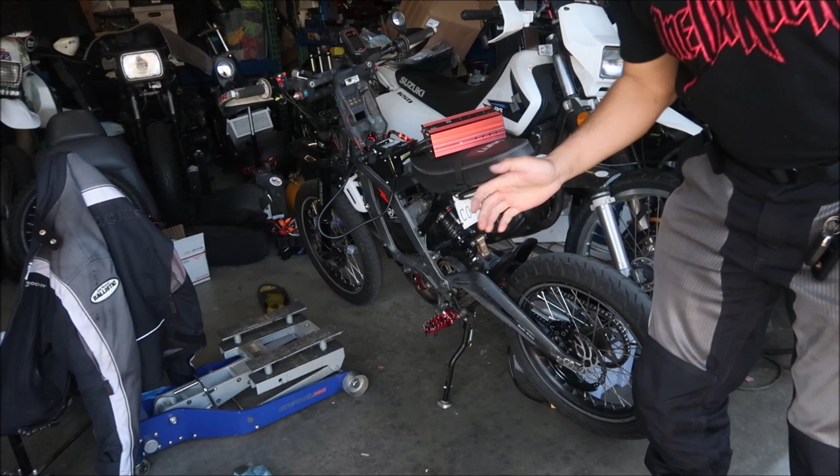As we go, right now you can see we're at 67 volts. I think it was like 63 volts when we first started. It sure is creeping up fast, but I imagine once it gets to about 70 volts, it's going to stay at 70 volts for a long time. You'd have to kind of look at the chart for how the voltage or the charge curve is.

A lot of batteries, especially lithium-ion batteries, have a flat curve. It's flat until it runs out of power, and it just kind of nosedives. That's what happened to me when I was riding - it seemed like it was running fine, and suddenly poof, no more. Not much of a warning, so you got to be careful.

When it gets to that flat line, it'll suddenly go up, and that's when your battery fully charges. That's when you're at about like 90%, and that's when the charge starts going down a little bit. But yeah, you'll see I've got it set to 12 volts, 12 amps. I will be keeping an eye on it.

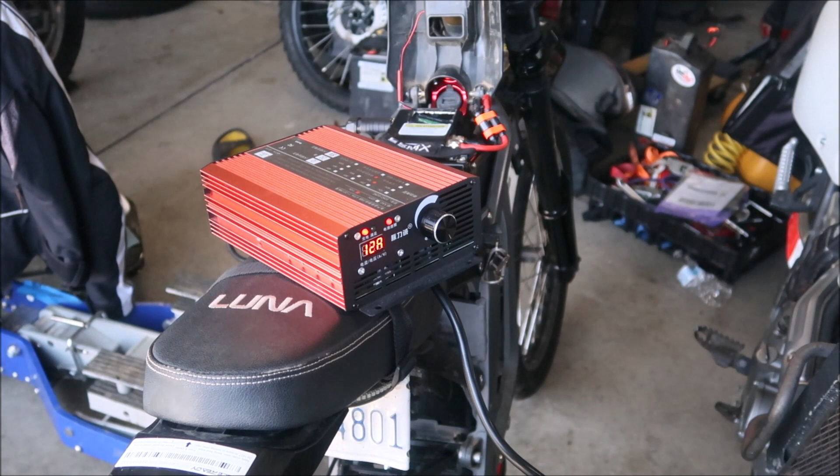I can look at my inverter - it's hooked up to my solar inverter right now. I can tell if the load drops suddenly, because this eats up about 1000 watts. So we'll see how long it takes to charge this battery. My guess, from what I heard, is it takes 3.5 hours to charge it. So we'll see, we'll charge it back up to 100. See you guys then.

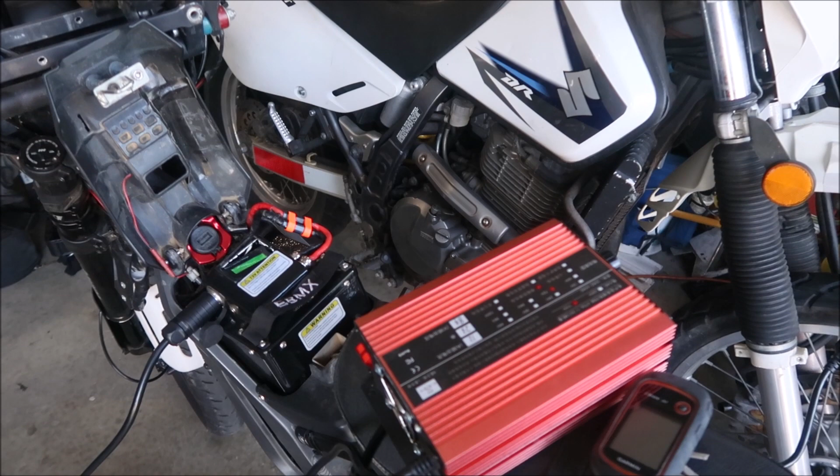Okay, like 17, let's call that 20 minutes into the charge. 20 minutes, we add like 3 minutes. So I want to feel the cord. The problem I had with my Lightspeed Bikes charger is that this thing would get too hot - the cord would get too hot. So the cord is thicker on this one - this is a very thick cord, like a 14 gauge cord.

However, the connector gets pretty warm. I can feel my extension cord getting warm here. This is a pretty heavy duty extension - a 14 gauge extension cord, so it shouldn't be getting hot. That's what I say, but it's not like super duper hot where I think it's going to catch on fire, so I think it's okay. The Lightspeed Bikes charger would get really hot - the whole cord and the plug would get hot, everything would get hot. I would have to put a fan on it to cool it down. This one, no problem - the cord is adequate for this charger.

And I know you can get these chargers from Grit Shift. This is like a $200 charger, guys, pretty expensive. So we will note how hot the charger gets maybe after like an hour or so. Like I said, I think this is going to take like 3.5 hours to charge - that's what they quoted, they say it takes about 3.5 hours to charge. We'll find out. It was completely dead when I plugged it in.

All right, it's still plugging away, guys. 2 hours and 33 minutes, all right? Still charging. It's about 78 volts. I don't know if you guys can see that. Yeah, 78 volts. What is that?

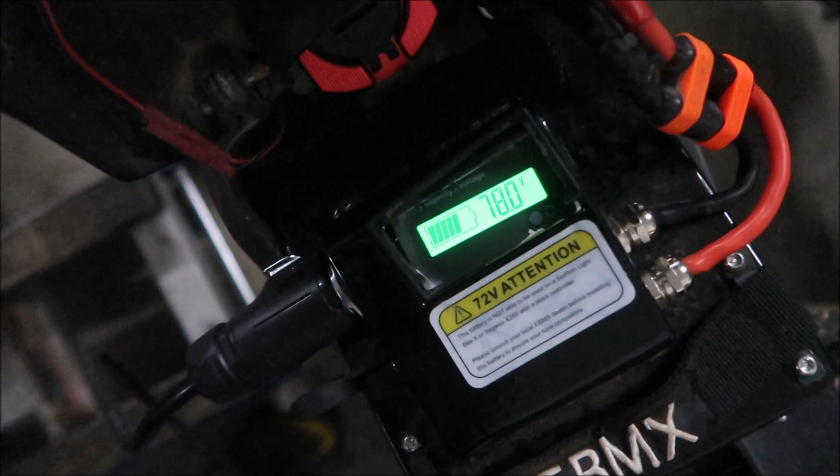It's like 80% or something. Yeah, somewhere around 80% charge right now. So still got some ways to go. Actually, we're supposed to add 3 minutes to that, so it's 2 hours and 36 minutes right now. To get to about 75-80% is like 2.5 hours.

Okay, guys. Keep on plugging. This is the part of the charge curve that takes the longest, guys. This is where it absorbs all the energy, okay?

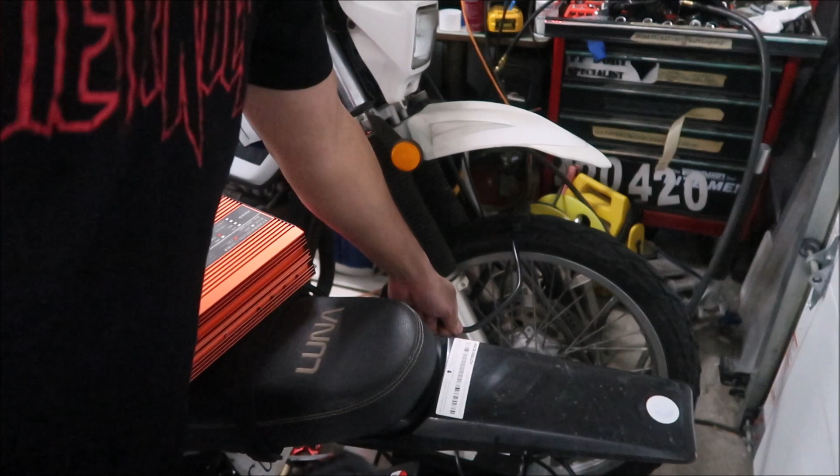All right, also I want to do a quick report on the cable. The wire, not really warm at all. The plug is pretty hot. Yeah, the plug is hot, man. The cord is starting to get hot, the extension cord.

Well, the farther you get away from the plug, it starts to, yeah. I think the plug is like the kind of limiting factor here. The plug gets really hot, man.

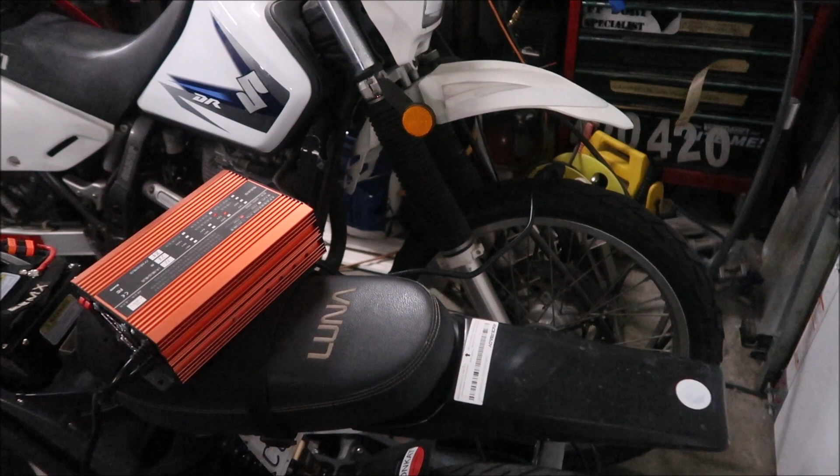Maybe this plug is not supposed to be used for how much current we're pulling right now. Let me see. Okay, I've got this hooked up to my inverter right now, and I'm not pulling any other loads. So right now we're pulling about 1,000 watts. That should be perfectly fine for a 120 volt outlet, American 120 volt outlet can do like 1,500 watts, guys.

Fine, all right, so there should be no reason it's getting that hot, all right. But it seems okay, it's not getting like super hot, is what I'm going to say. So yeah, maybe it'd be better to plug it straight into the outlet. But the wiring is not getting hot at all, the wiring is perfectly fine. The only reason this wire is warm is because the plug is getting warm and that heat is transferring to the wire. So it seems like the wiring is good, but the plug is generating a lot of heat, okay?

And I'm using very good wiring. I got it hooked up to a 14 gauge extension cord, all right? That's a very high quality extension cord, okay? But yeah, you shouldn't use an extension cord with this, guys. You should plug it straight into the outlet, but it's just easier for me, okay? But anyway, it seems like I've had it on for 2 hours, and it's not super hot, so it's fine, okay?

All right, if you're wondering if the battery's getting any warm at all, it's not, guys, all right? It's a little bit warm, teeny tiny bit warm, but it's perfectly fine. This 42 amp hour battery, you can safely charge it at like 42 amps, guys. So that's 1C. You could safely probably charge it at like 80 amps, okay? So the battery can definitely handle this, okay?

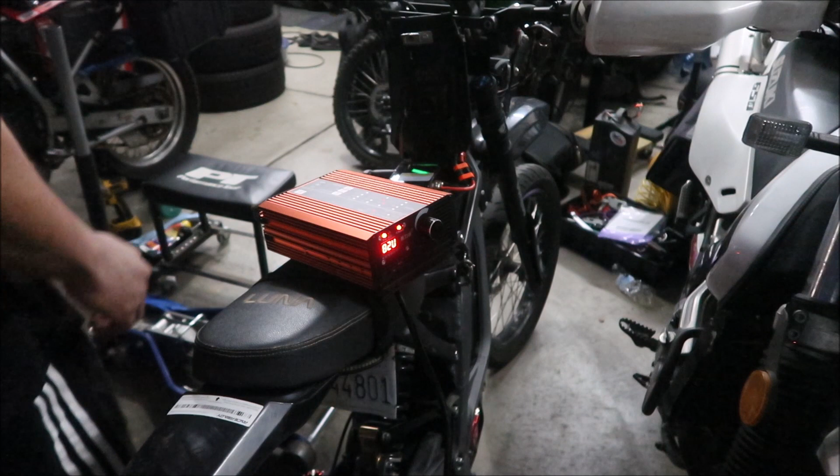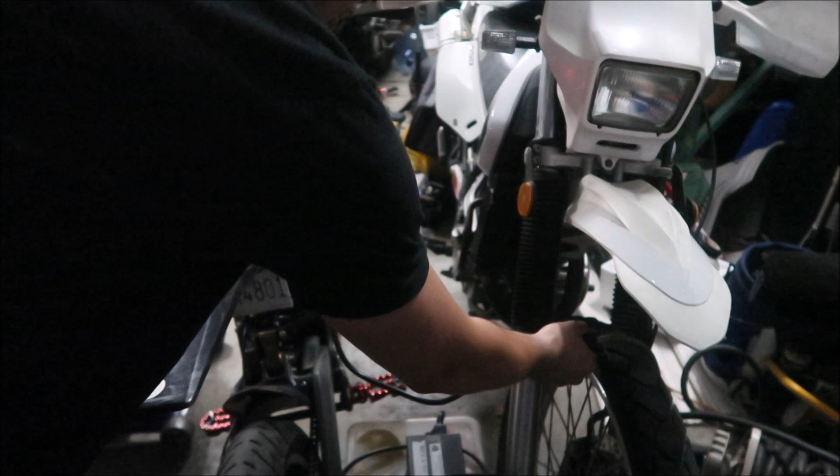And it's pumping 11 amps into it, all right? And after 3 hours and 17 minutes, the cord is warm. It's warm, but it's not hot, okay? Yeah, it's warm, but it's not. I think it's because I opened the garage and it's cool right now, so yeah, definitely on a warm day you want to watch that, okay?

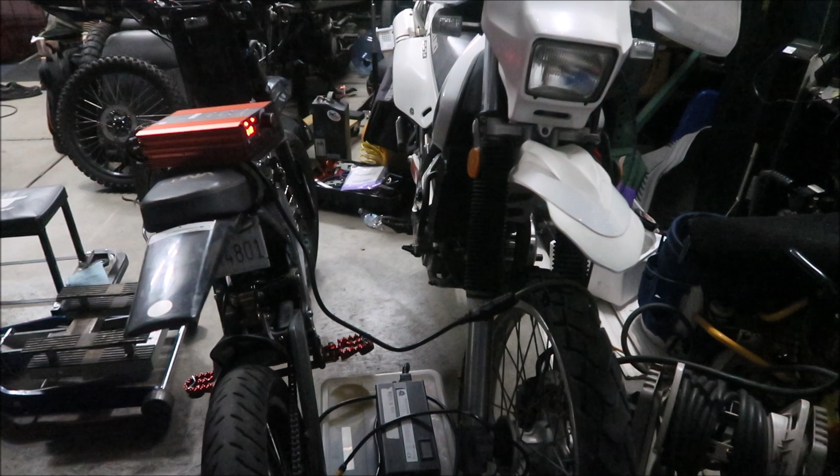Or just don't charge your battery at a high rate, okay? Like 12 amps, just charge it at a lower rate and it will stay cooler, all right? The cord will stay cooler, I guarantee you that, okay? So yeah, we're just waiting for it to finish. Supposedly this battery takes 3.5 hours to charge, and we got like 10 minutes pretty much. All right, because remember we add an extra 3 minutes.

All right guys, 3 hours 44 minutes plus 3, we'll just call that 3 hours 48 minutes. Okay, still charging, you could hear it, guys, this fan is hella noisy, man. We're at 83.8 volts, all right? We're nearly charged, all right? But it's still plugging away.

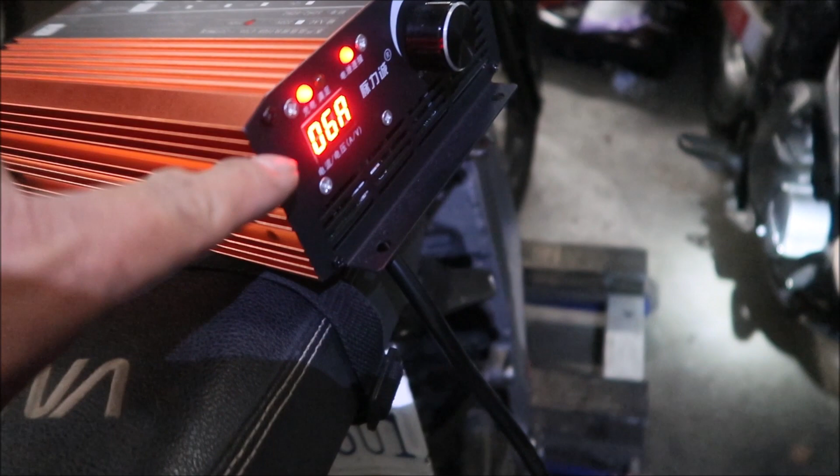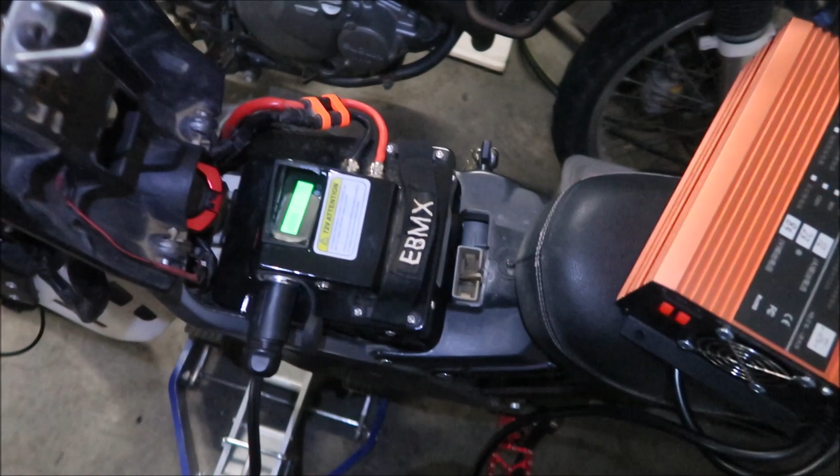Oh, there it goes, it's moving around a whole lot. I think it's almost done charging. All right, let's see what this says. This says we're at 84 volts. It's pretty much done charging. We can watch it finish charging right now, okay? So the charger should shut off real soon.

It's at 84 volts. All right, this should start to get cooler, but it's still warm. Okay, it's cycling between 6 and 1 and 10 and 3. I never seen my charger do that before. All right, it's almost very similar to this charger. Okay, but it's doing some crazy stuff right now. It's nearly charged.

Any minute now. I know, we really shouldn't watch it charge, guys, this is a bad idea. But it says it's 84 volts right now. It's almost 84 volts, yeah.

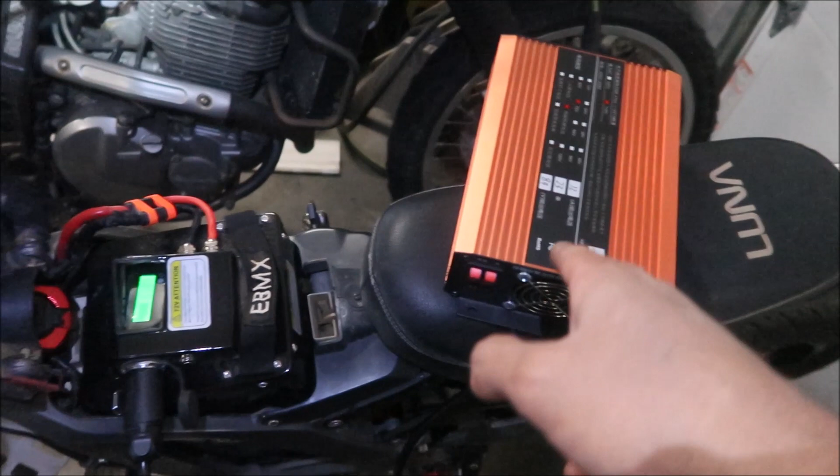I'm pretty sure that the battery, if it gets high enough, will say hey, no, I don't want any more, I'm going to disconnect. But... oh, there we go, there you go. So it's trying to top it off a little bit, all right? It's at 83.9 volts. So I think what it's trying to do is lower the current down a little bit. Yeah, it's trying to lower the current so it can cram as much power in there as it can.

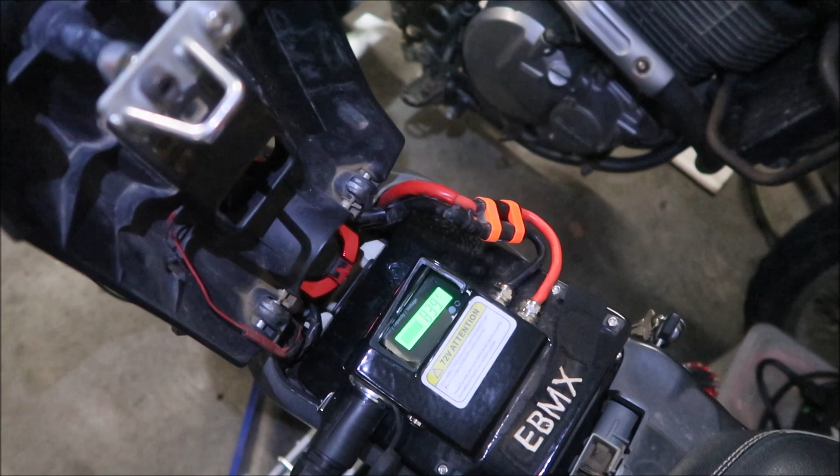I pretty much say that's fully charged right now, guys. It's still just shutting off and turning on. It's 83.9 now. Starting, stopping, starting, stopping. It's gonna stop eventually, it's trying to get as much power in there as it can.

All right, so my suggestion is don't charge it all the way, guys, if you're not gonna ride it right away, like the day before or something, you know. If your bike is gonna sit for more than like a day, then don't charge it all the way. So it's better for the battery.

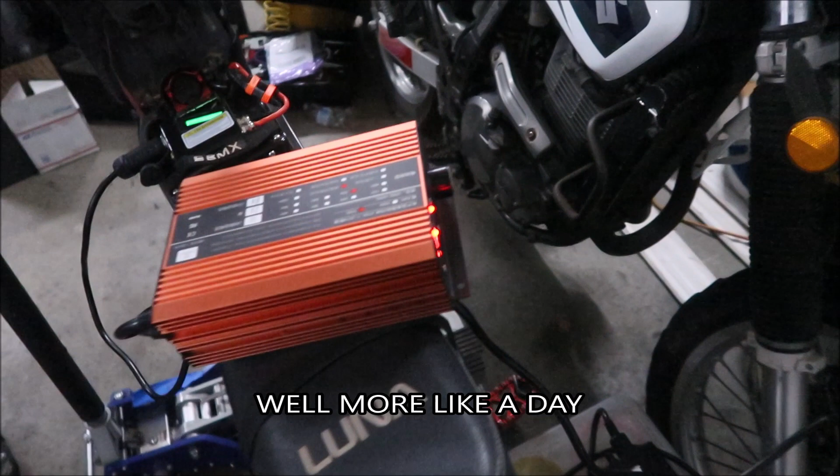But yeah, it's still plugging away, keeps on saying it's charged and not charged. That is really weird, my charger never does this. It might do this a couple times and then it just stops, but this one kind of can't make up its mind if it's charged or not.

It's trying to get it to 84 volts exactly, guys. You can hear it. So remember, when you get past like the 90% state of charge, like around 82 to 84 volts, it's going to start lowering the current down.

Should we help it? Should I lower the current down? I don't really want to touch the charger. I haven't touched the charger at all, other than like to put it in, like to change the voltmeter. That is so odd, right?

I want to look at the charge curve on my inverter and see what it looks like. It's probably gonna have all these dips and stuff. It's trying to get it to 84 exactly, man. It's at 83.9. I don't know if that's good for the battery to just have it turn on and off like that all the time.

Should stay red. Okay, oh no, I thought it was gonna... It can't decide if it wants to charge or not. It was thinking for a second, oh I think it's charged, I think it's charged. Okay, that's it, I'm not waiting anymore.

That's it, it's done, all right guys. It says 84 volts, it's still playing this little thing. So what it's trying to do is lower the current just enough so this doesn't overcharge, all right? It's trying to get it at 84 exactly. Even though it's at 84 volts right now, it should stop right away.

Oh see, so when you apply a current to it, the voltage will go up, and then when you take the current out, the voltage starts to sag. So what it's trying to do is keep it at 84 volts. I think it's done, guys. Yeah, it's still trying to top it off, but I'm going to say that's done, all right guys.

So it took 4 hours to charge this battery. Yeah, let's just call that 4 hours guys, it's like 3 hours 50, I know we're supposed to add a few minutes but let's just say 4 hours, okay? And I think it just stopped. There we go, it's not doing anything. So 4 hours, it took 4 hours to charge this bad boy with this charger set to 12 amps, all right, that's about 1,000 watts or something.

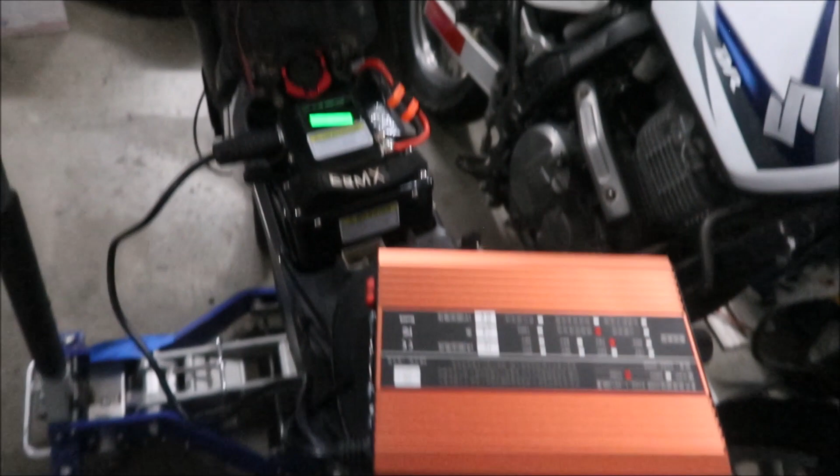12 amps, okay, 4 hours to charge a EBMX 72 volt 42 amp hour battery. I think that's roughly 2.8 kilowatt hours, okay. So there you go, if you're wondering how long it takes to charge one of these monster batteries, it takes a while, it takes like 4 hours, okay.

I think Lightspeed Bike's battery takes around 3 hours, when it's fully empty. But I'm going to call that it, it's still trying to charge it but I'm going to shut it off. You're done, you're done bro. 4 hours, okay. So yeah, if you wanted to know how long it takes to charge the EBMX 72 volt 42 amp hour battery at 12 amps, it's 4 hours guys, okay.

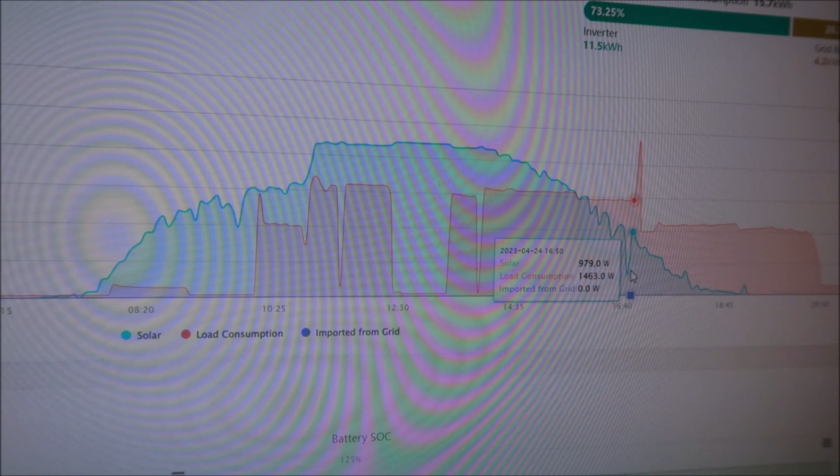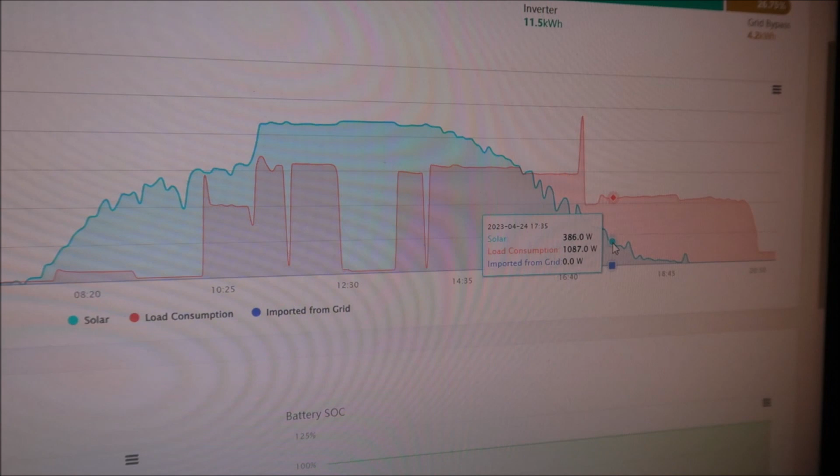If you guys want to see what the charge curve looks like when we were charging the EBMX battery, here it is guys. So I believe it's this right here, okay. So it kind of goes up, and it looks like it eats up about 1,000 or 1,100 watts.

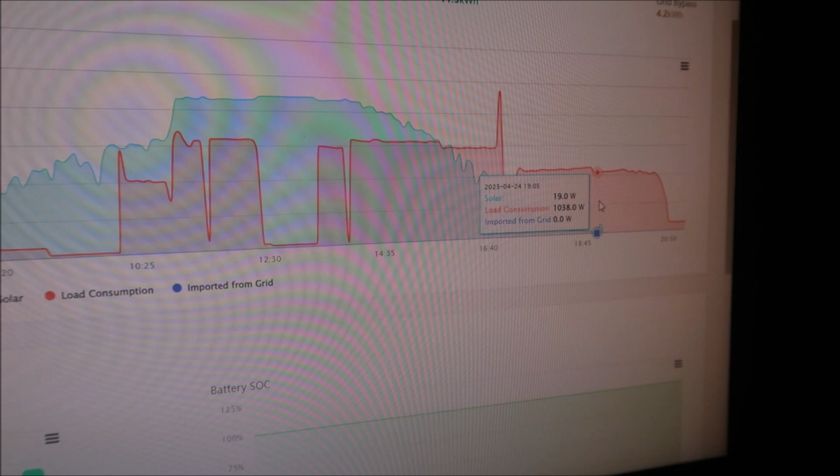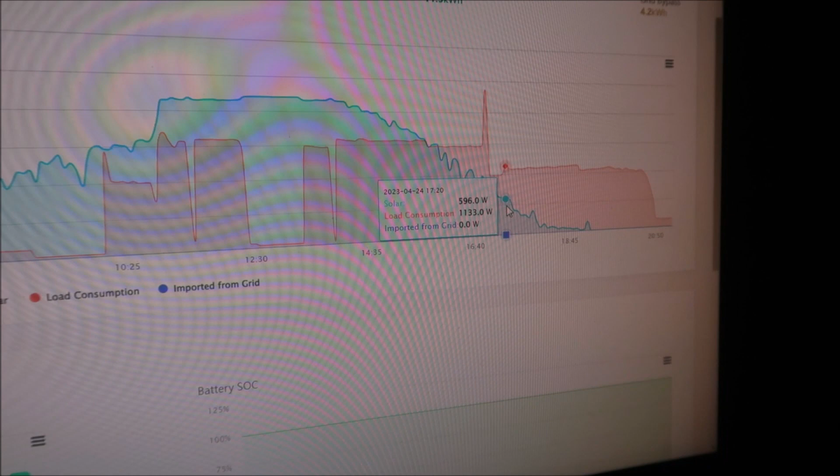Then it goes down a little bit, so like halfway, the power went down a little to 1,000. So it's charging at 1,100, yeah 1,100, and then it goes down to... let me see, when did it start? It started at 5:20 and it went down at 19:00, so 2 hours, yeah about 2 hours.

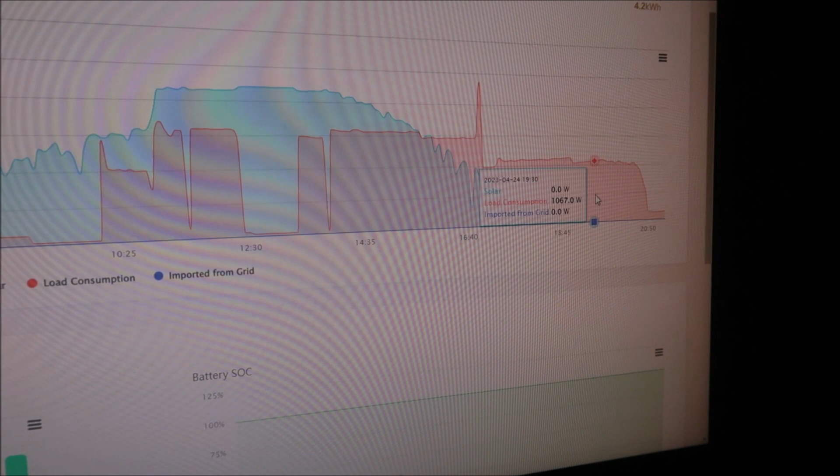About halfway through the charge, the current goes down a little bit, okay guys, and then 1,000 watts, 1,000 watts, 1,000 watts. It kind of goes up and down a little bit, and then the battery is fully charged, almost, and the curve starts to drop. So at 8:30 it continues to drop until almost 9, so it takes that last 30 minutes, starting tapering the charge off slowly.

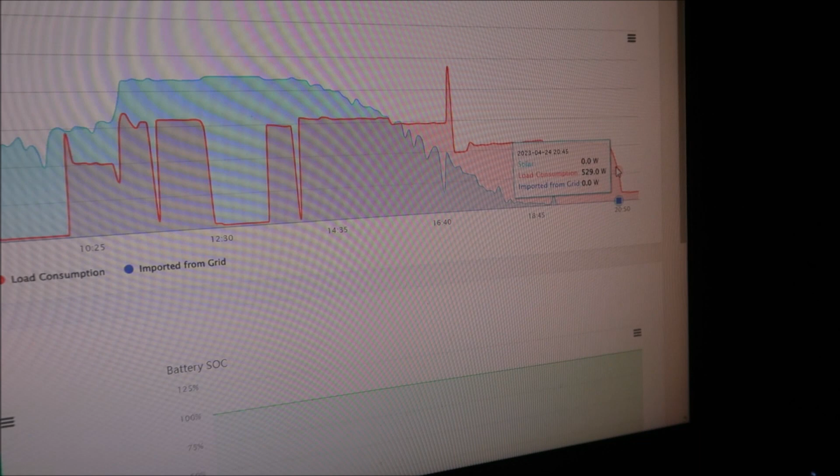So the interesting thing is, remember when the charger was turning on and off? You can't see that here, all right. So it was keeping it at a certain current until it was fully charged, and then boom, there.

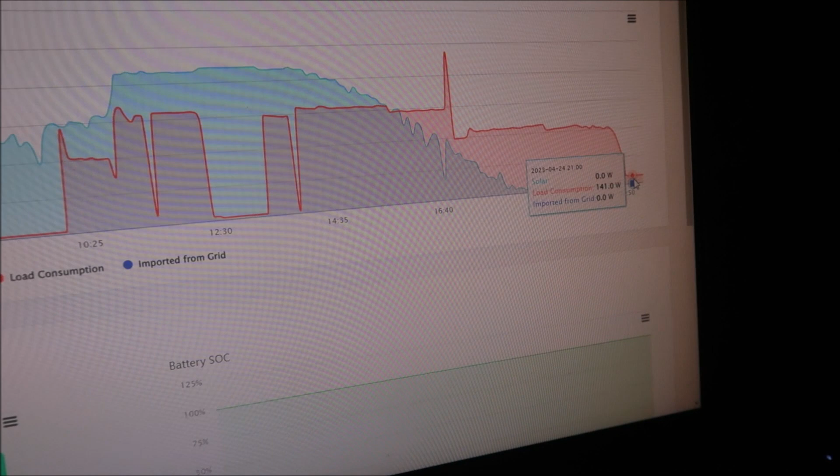And I think this 100 watts is probably my refrigerator. Oh yeah, you know, I know, so this is all the combined loads in the garage. Probably I was running my refrigerator at the same time, so the refrigerator eats about 100 watts. So you'll see this 1,100 watts is probably really only 1,000 watts, and this is probably 900 watts right here, and then it goes down, down, down, down, down.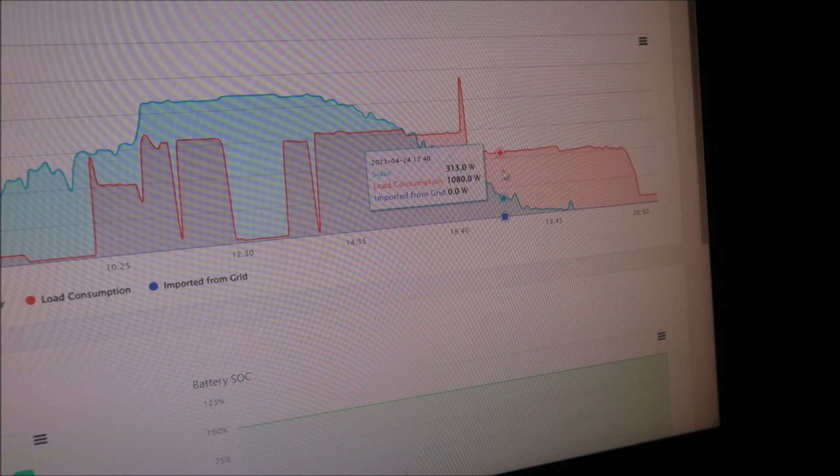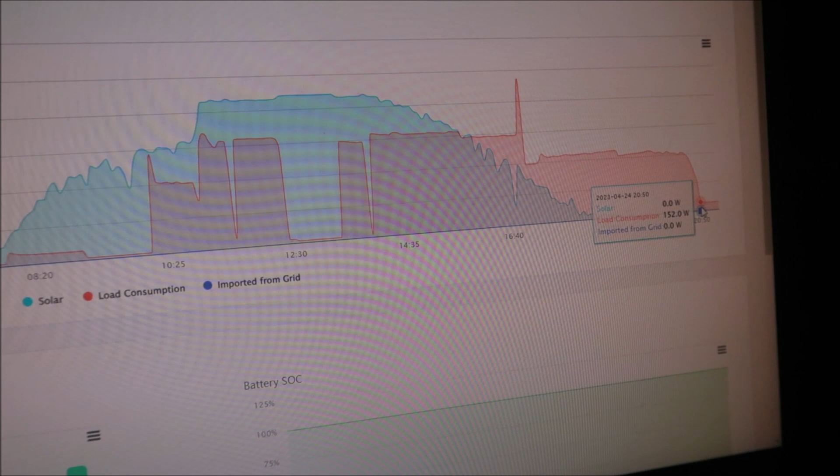And that's it, all right. So what was this? Let's just say this is 5, yeah sorry, we started charging at 5 and it ended at 9, 5 to 9, 4 hours guys. So there you go, took about 4 hours to charge that battery. It's a long time. All right, thanks for watching.